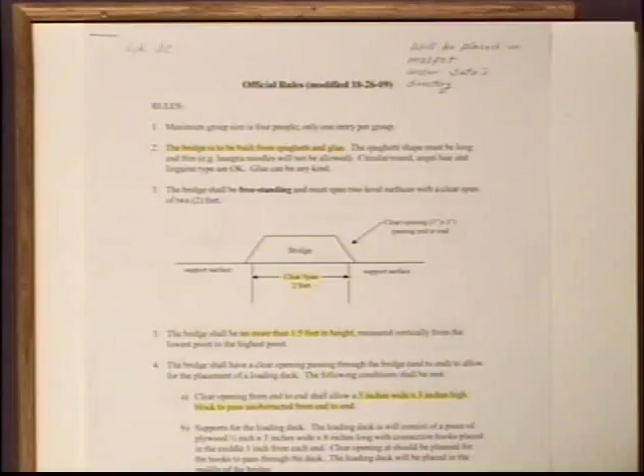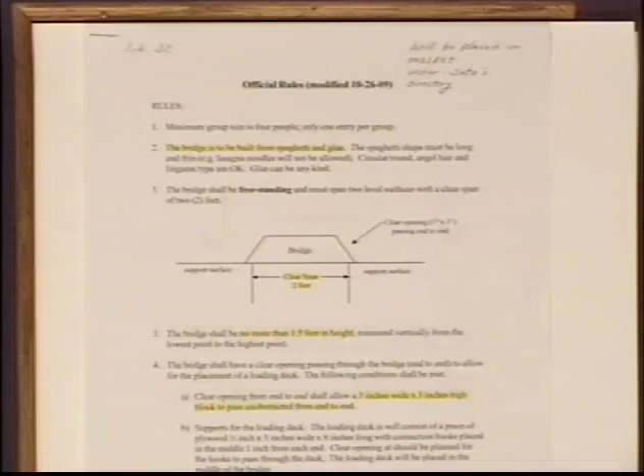Maybe you could open it on MOSFET and we could see it through the computer. On MOSFET, that might be a good idea. Somebody had a good idea there. But I think he's trying to figure it out too, maybe we can do it at the same time.

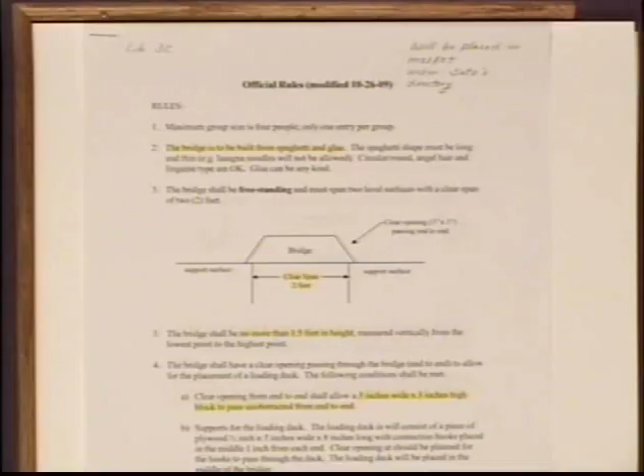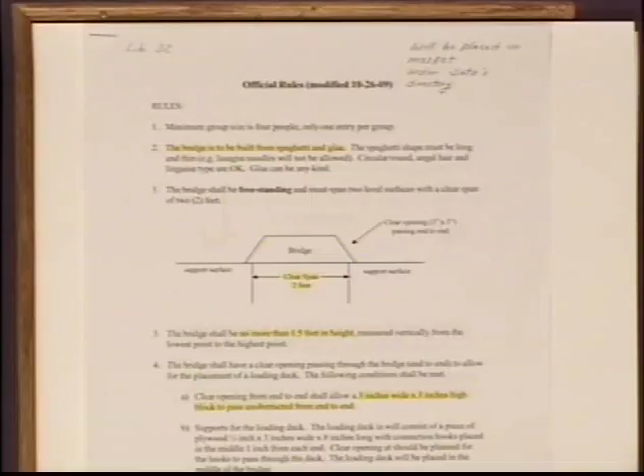All right, go in here. What's the address for MOSFET? Okay, that's it. So this is how you guys can go into MOSFET, right? MOSFET ISU. Well, I'm going to show this to you anyway.

So you go to, oh, you cannot see this now. Can you switch back to the screen real quick? Okay, sorry. So you just type in again mosfet.isu.edu. You go in there, and at the bottom toward the end it should say Sato. See that? And in here it should say Engr 120, and this is the rules, okay?

I think what happened was when Dr. Sato put the rules on last night, one of the pictures got screwed up, so maybe I shouldn't use this one. I'll bring that to his attention. This picture here, notice these are supposed to be hooks, this should have been really down in here. I don't know if I can move it, but there should be a hook here. That's a hook, and that's supposed to be a hook too. I'll show it to you over here.

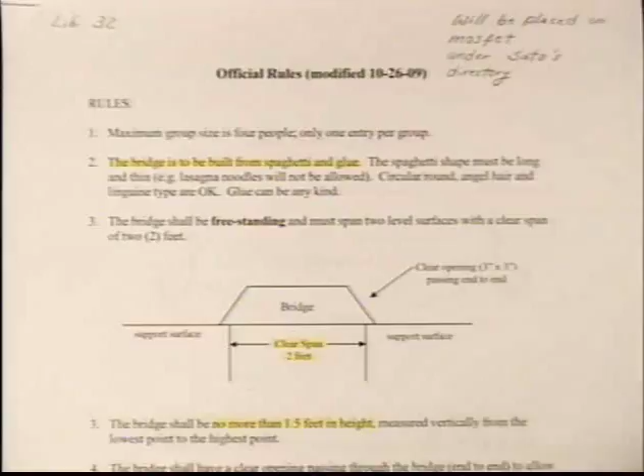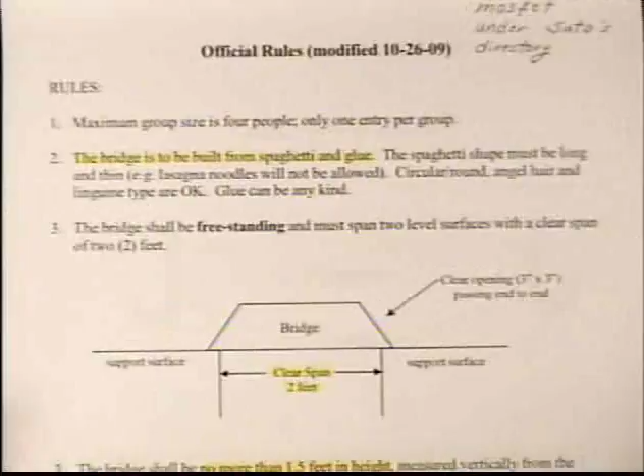So let's switch back to this, if you don't mind. Too complicated, I know. Okay, so this is the rules. By the way, the rules were put together by Dr. Sato, so we have a lot of collaboration here. It says maximum group size is 4 people, so in each group, I suppose, only 1 entry per group.

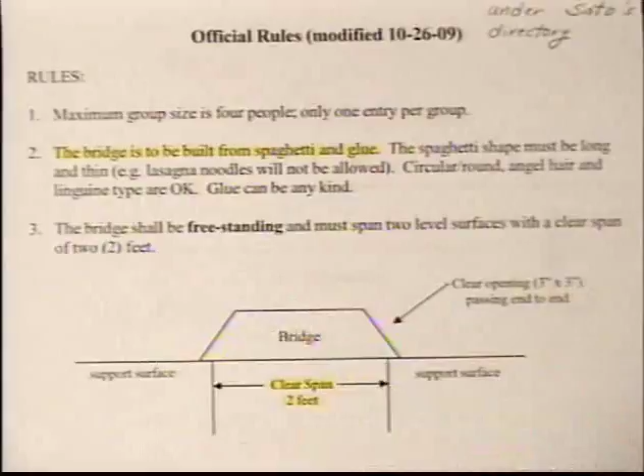The bridge is to be built from spaghetti and glue. The spaghetti shape must be long and thin, lasagna noodles are not allowed. So circular ones, those are the typical spaghetti noodles. I wouldn't go too crazy on various types, just use the standard one - that's my suggestion, but it's up to you.

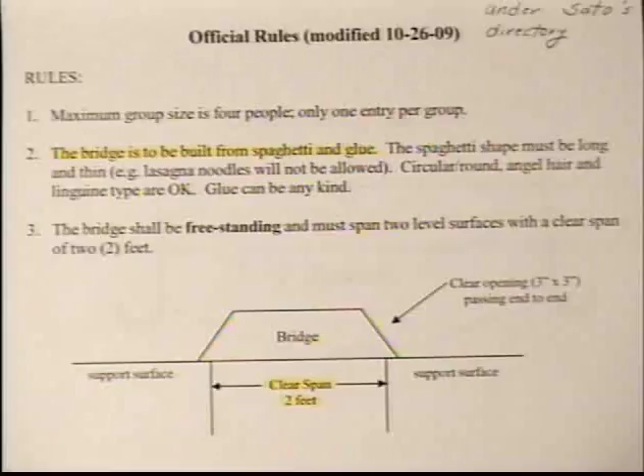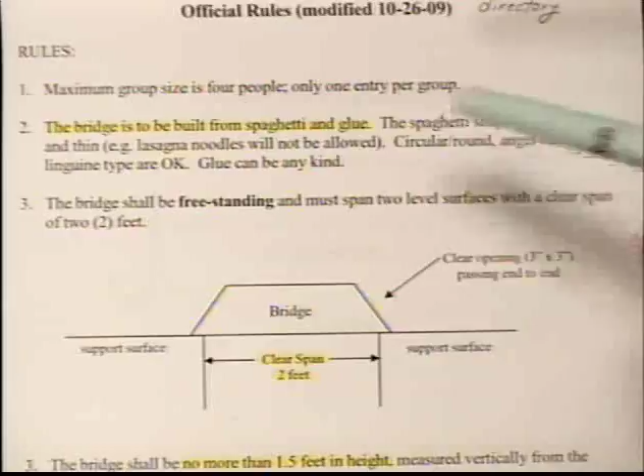And glue can be any kind. I think he had in mind something like Elmer's glue, but of course it has to dry up, and you would lose some weight from the water in the glue. I think there's some information about the total weight toward the end. So that's the glue and the noodles, I mean the spaghetti and the glue.

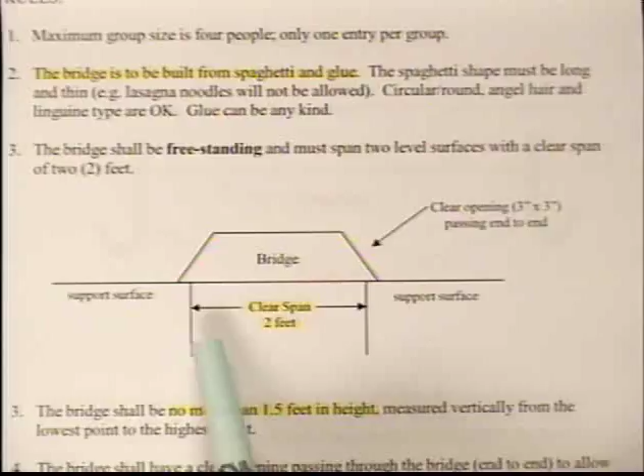The bridge is going to look like this. We're going to put 2 tables over here, and make sure there's a distance of 2 feet between the 2 edges. So your bridge should be a little bit more than 2 feet, don't take a chance - if it's exactly 2 feet, it's going to fall through. So this should be a little bit more than 2 feet.

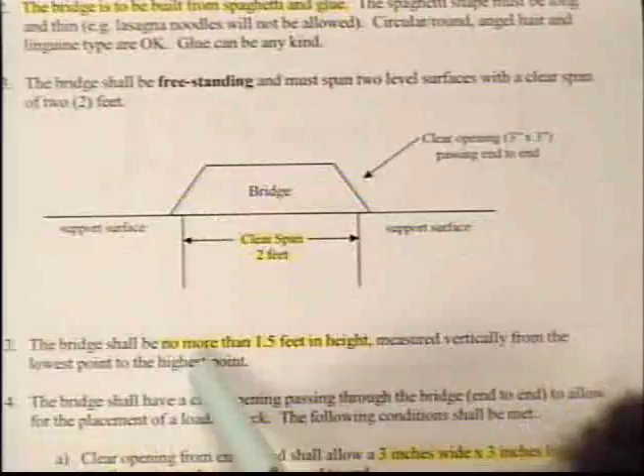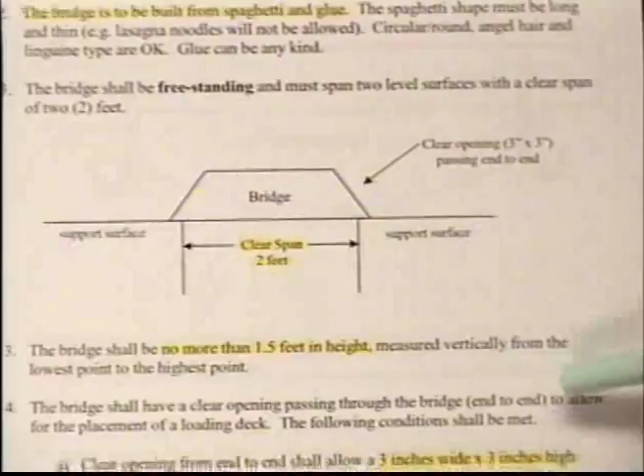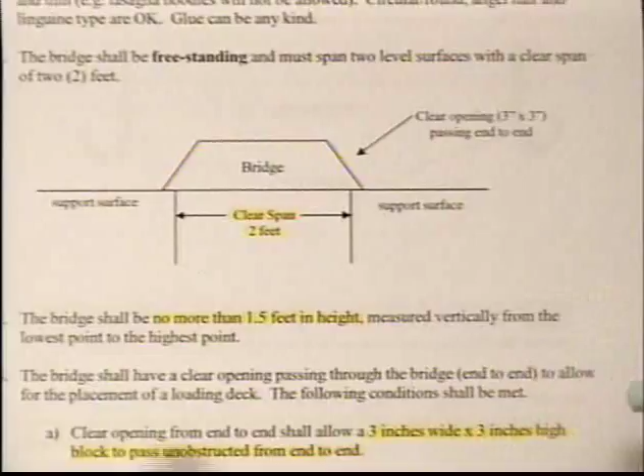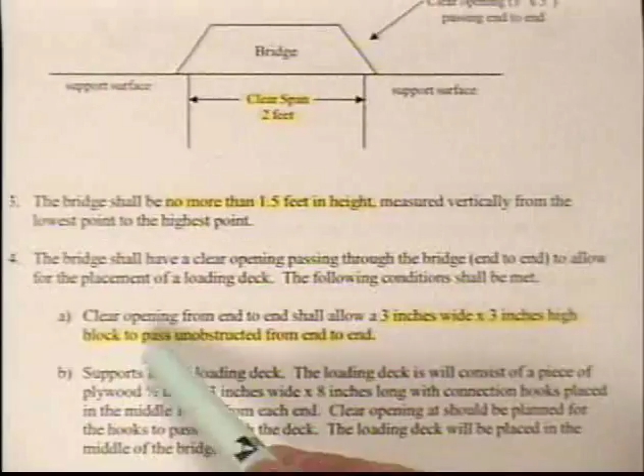And here's more information: the bridge shall be no more than 1.5 feet in height, so you have a height limitation, plus the span. Height is measured vertically from the lowest point to the highest point. The bridge shall have a clear opening passing through end to end to allow placement of a loading deck. The following conditions shall be met: can you see okay? The clear opening from end to end shall allow a 3-inch by 3-inch high block.

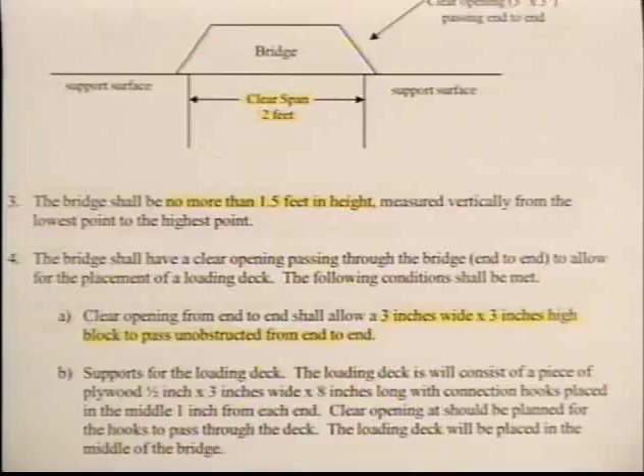So I guess we can bring a block, which is like 3 inches by 3 inches, and that should go across the bridge, like a truck or something. So there should be enough opening for that block to pass through.

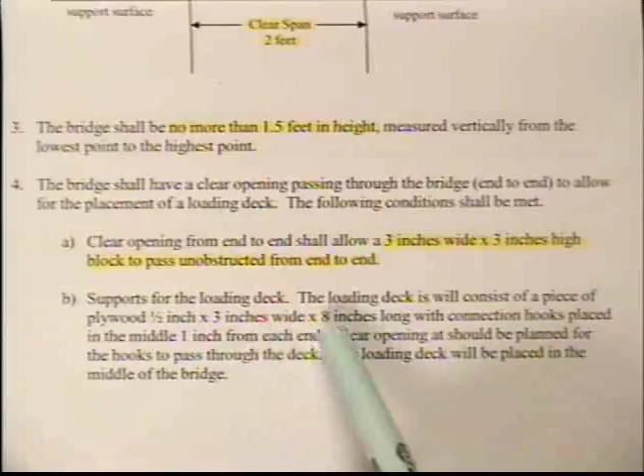And support for the deck, the loading deck will consist of a piece of plywood, which I'm going to show you on the next page. It's half inch in thickness, 3 inches in width, and 8 inches in length. So imagine the loading is going to be applied through a plywood, again 8 inches by 3 inches, right in the middle of the bridge.

There would be 2 hooks at the bottom of the plywood, so you have to slide the plywood inside. If you have enough opening, it should fit. And make sure there's room for the hooks to go through the bottom of your bridge. There should be enough holes in there, otherwise the hooks will not go through.

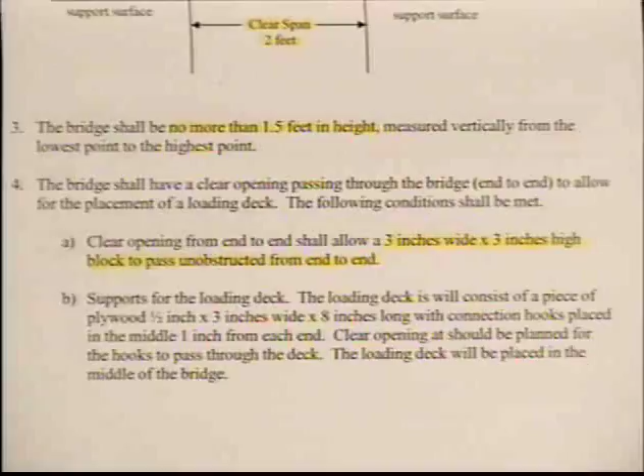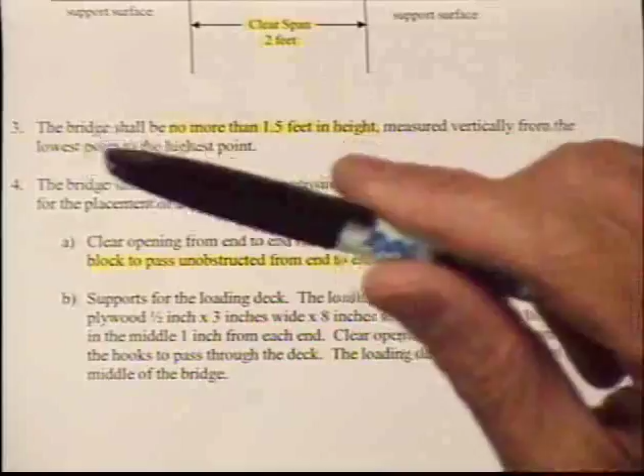And then we're going to attach a rope or something to the hooks, and then attach a bucket at the bottom. It will be like a 5-gallon bucket. It wouldn't be too heavy, maybe a couple of pounds or so. If you have a 5-gallon bucket at home, just measure that, how much weight that is. So at minimum it should handle that, and the weight of the plywood and the stuff.

So in fact, I can show it to you over here. Here's the 8 inches in length of the plywood. That's again half inch, and the 2 hooks. So you have to go to the hardware store and get a couple of hooks, and come up with this whole thing. That has to slide through, and then we can attach a couple of things in here, and the bucket will come at the bottom.

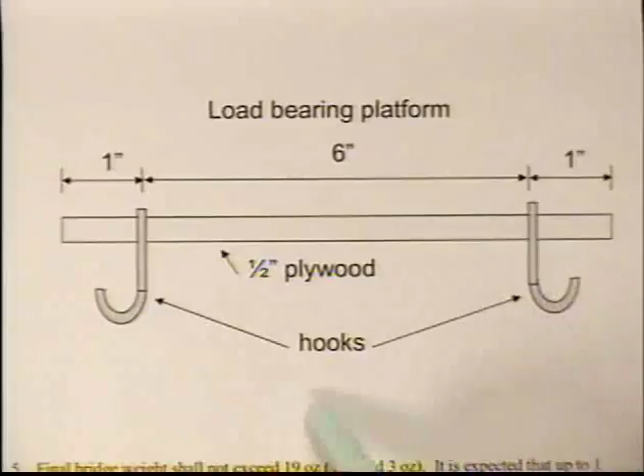And then what you need to do is we're going to probably give you a scoop or something, and slowly put some kind of, I think we're going to go with sand. So don't put it too fast and not too slow either.

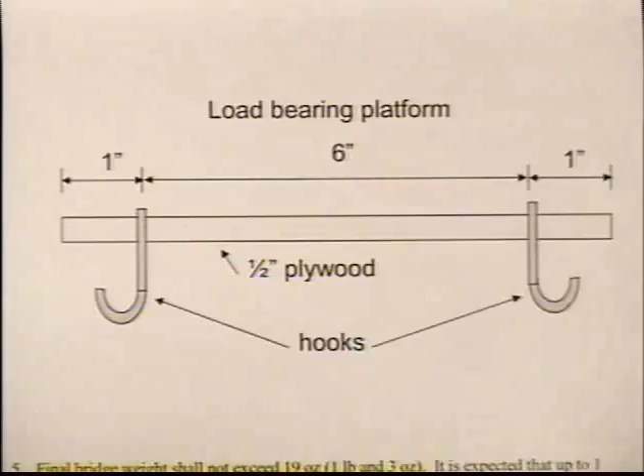Question? No, we are going to do it ourselves. We're going to bring one, and we're going to use the same one for everybody. So yeah, we will do that.

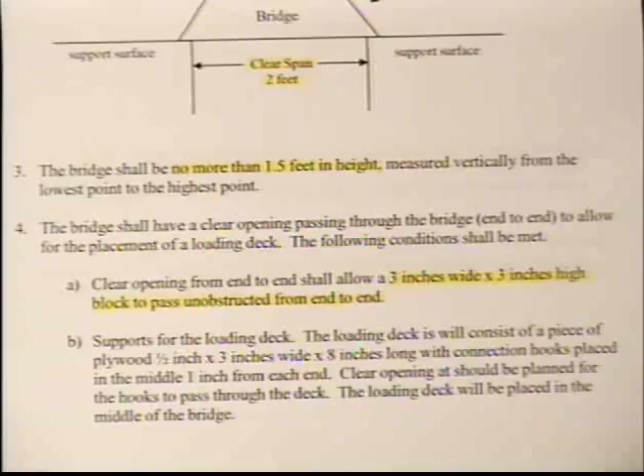The clear opening should be planned for the hooks to pass through the deck. The loading deck will be placed in the middle of the bridge, and of course the middle typically is the worst place to put it. And the final bridge weight shall not exceed 19 ounces, which is 1 pound and 3 ounces.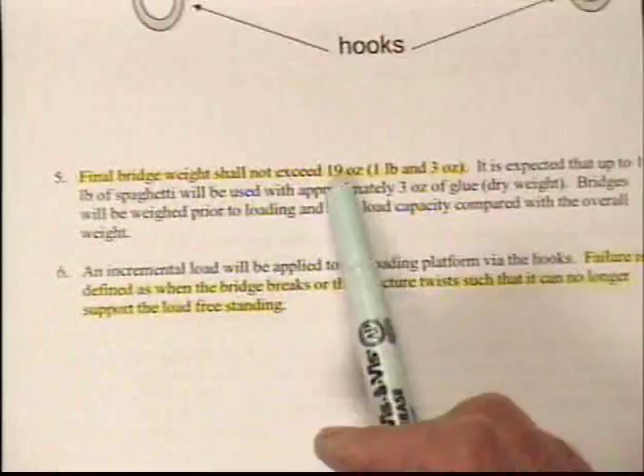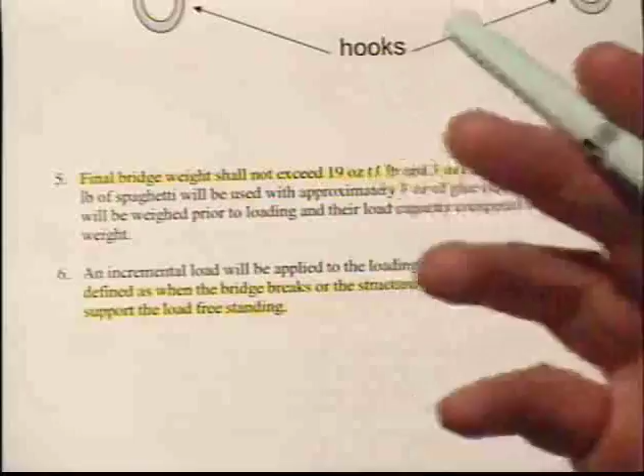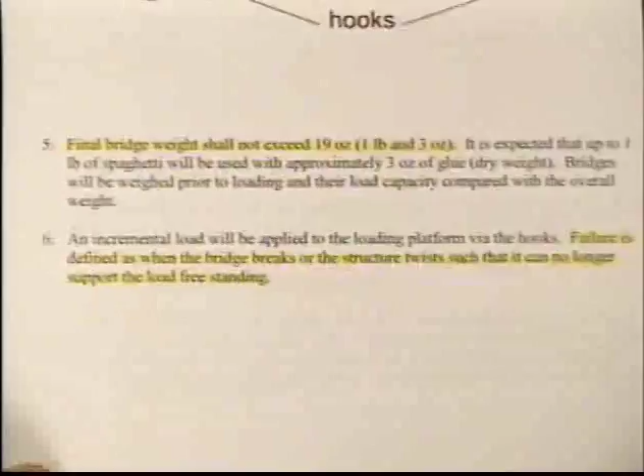I think he had in mind, if you buy a pound of spaghetti, then he's figuring maybe 3 ounces at the most for the weight of the glue after it dries up. Then incremental load will be applied to the loading platform via the hooks. Failure is defined when the bridge breaks or the structure twists. Maybe if it's twisting too much and it cannot handle the loading, then we will call it failure.

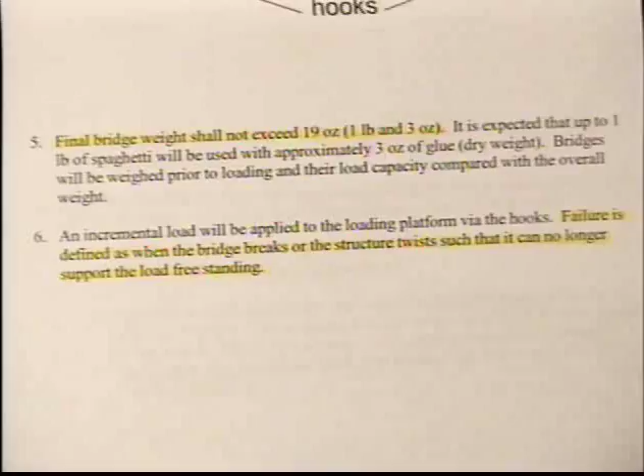Okay, so that's your bridge. Again, this should be on the web. Take a look at it, and I guess that's pretty much it. Any questions?

The question was can we use different kinds of pasta or one kind only? I guess the rule doesn't say that, does it? So I would imagine you can use anything you want. You can use 2 different kinds, sure, that's fine. That's even probably better.

Professor, another question. Maybe you want to build... push the button, or are you supposed to push the button yourself? Button's pushed, okay. We're building these outside of class and then coming and bringing them in the day that we're on the 9th. Yes, yes, so I think you can do it outside of class.

So plan ahead and work in teams. Monday, Dr. Sato will let you know exactly who the team members are, who the groups are. And then I think next Monday and next Wednesday, you don't have to worry about the bridge, so maybe that week you can work on it. And I believe the following Monday and Wednesday, we will break the bridges.

I don't know about that. You might want to ask Dr. Sato. Okay, all right, well, you have a good day.